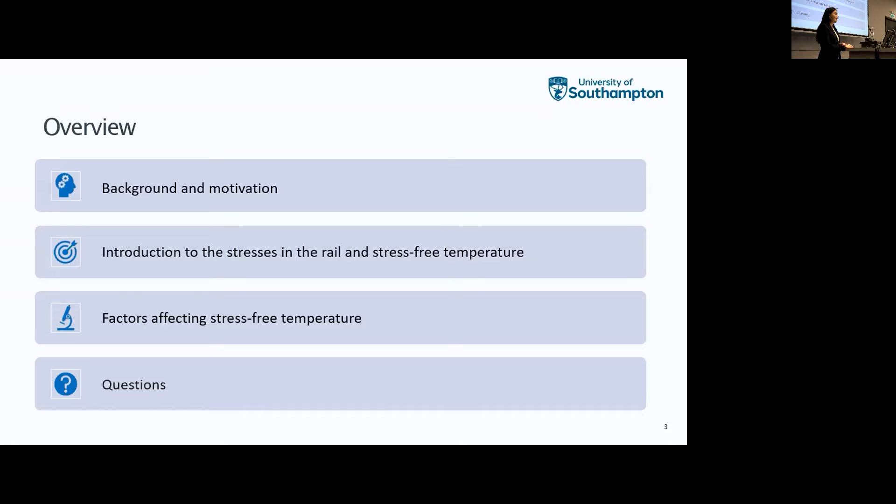We'll talk about the background and motivations behind my project, and then I will introduce you to the stresses in the rail and stress-free temperature, and explain why it's important. After that I will talk about the factors affecting the stress-free temperature and present some studies from my research, and hopefully at the end I will leave some time for questions.

Railways form an indispensable part of our social and economic infrastructure. They play a vital role in passenger movement across the UK, connecting people and communities. They have a part to play in reducing traffic congestion, pollution, and carbon emissions. Also, rail travel is perhaps the only form of mass, rapid, and long-distance transport realistically offering carbon dioxide zero emissions at the point of use on electrified lines.

Disruption can be caused due to rail breaks, track buckles, signal failures, and damage to the track bed, such as ballast washout during floods. These disruptions can endanger life and cause damage that is costly to repair. To mitigate future risks, the resilience of the railway infrastructure to expected climate change needs to be improved. In recent decades, much work has been done to improve our understanding and ability to manage rail stress, and yet it continues to be a concern for many companies worldwide. My research is concentrating on the management of rail stress with climate change for the continuously welded rail track.

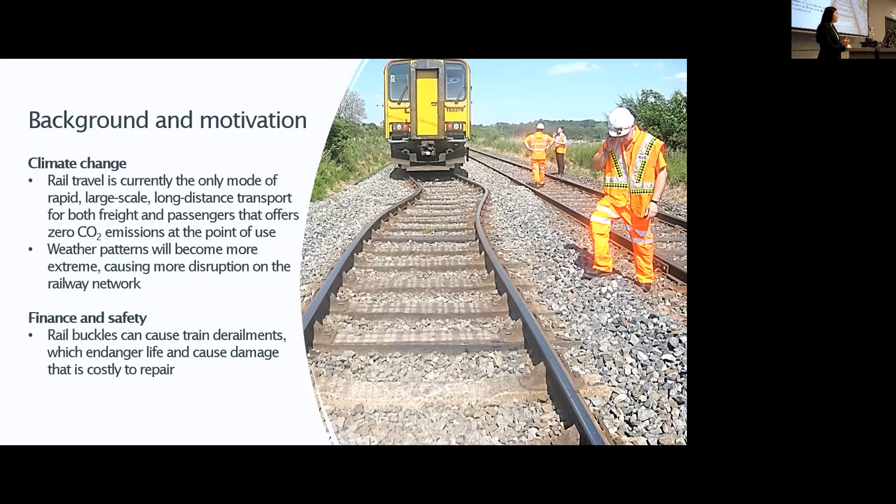This accelerates rail failure, sleeper wear, and disruption of the ballast at the joints. So with time, continuously welded rail was introduced to eliminate these issues. Instead of connecting two rail sections with joints and leaving an expansion gap between them, engineers decided to weld long sections of rail. This eliminated the issues associated with jointed rail track, but it brought up a new issue, which is the buildup of stress, as there is no gap in between steel sections anymore.

To better understand this, I produced some figures. In the first figure, we have a steel beam fully fixed on one end and free on the other, to represent the jointed railway track. When the temperature increases, it can expand and contract freely, and the structure will not be disturbed.

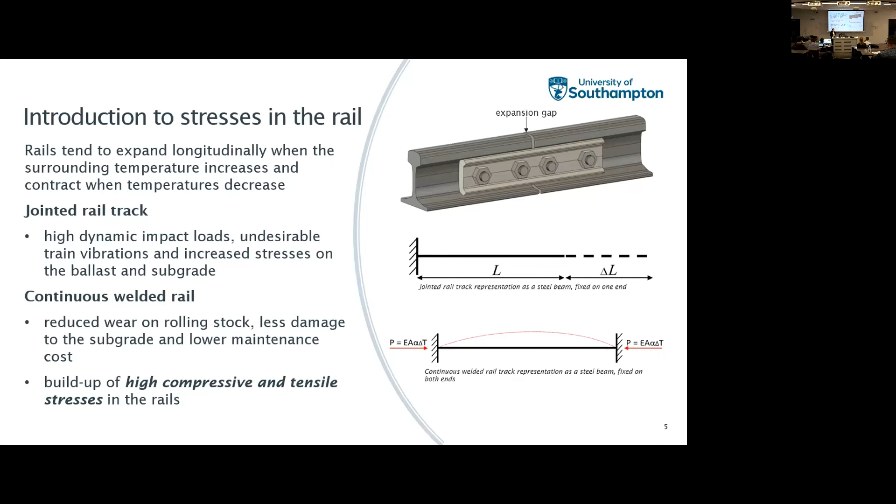So to manage the range of temperature the rail can withstand without buckling or breaking, the stress-free temperature was introduced. So what is the stress-free temperature? Stress-free temperature is the temperature the rail is fastened to the sleepers without the creation of stresses. It can also be called installation temperature. In the UK, it is at 27 degrees Celsius.

So large internal tensile or compressive forces can lead to rail breaks or track buckles. And it can happen when the internal forces are sufficient to overcome either the local tensile strength of the rail or the lateral restraint to buckling provided by the track system.

Also, the stress-free temperature is used to determine the critical rail temperature, which is the temperature at which measures to protect the traffic must be taken, usually speed restrictions.

However, it is not easy to measure the actual stress-free temperature in the rail, as the measurement techniques are generally difficult to deploy. Thus, it is important to understand the factors affecting the stress-free temperature so it can be easily estimated and the correct critical rail temperature can be assigned to prevent any accidents.

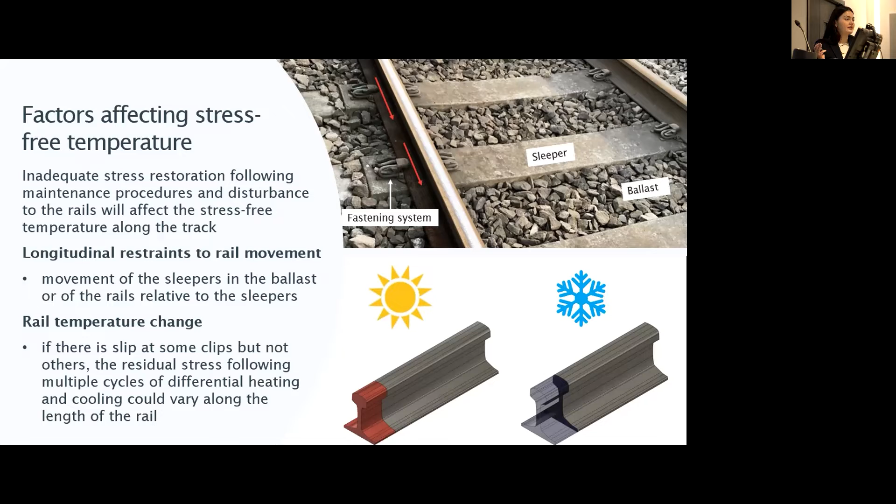This depends on the track location, so part of the track located, let's say, in the sun and part in the shade. And if the fastening system is not adequate, there can be differential movement from the hot part of the rail to the part of the rail in the shade, affecting the stress.

So the third factor is the longitudinal acceleration forces. These forces also require inadequate condition of the fastening for them to permanently affect the stress-free temperature.

I decided to have a closer look at track settlements. As I said before, due to these track settlements, the rail tends to bend vertically to fill in the gap in the ground.

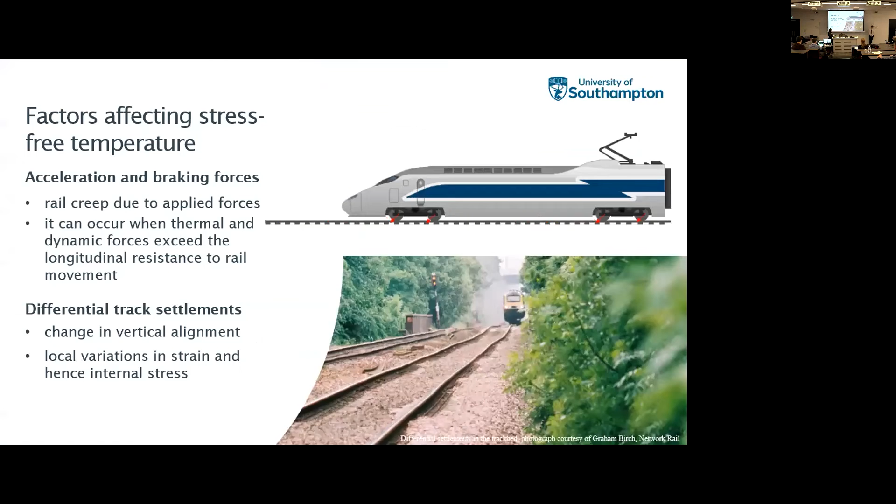Yeah, so if I can, I go back. So as I say, we have something called the stress-free temperature of the rail.

So basically, when the new track is built, or after the maintenance, the engineers come and they stress the rail to a temperature of 27 degrees in the UK. At this temperature, the rail has no stresses, so the stress is zero.

In other parts of the world, for example in China, where the temperatures are higher, the stress-free temperature is probably going to be higher because they don't experience the low temperatures. But for the UK it has to be 27 degrees, because in winter we do have low temperatures, and if our stress-free temperature were higher, in winter we would experience track buckles.

Sorry, the rail breaks. It might reduce the track buckles in summer, but it would be dangerous for trains to move in winter. In some countries they also re-stress the rails.

For example, if they have really hot summers and really cold winters, they do re-stressing of some parts of the rails, but it's expensive. In the UK they don't want to do it, and there's no point doing it because our temperature variation is not that big. We don't have like minus 40 and plus 50.

So for now the stress-free temperature is 27 degrees, but it's also part of my research to look into whether we need to increase it a few degrees, or whether we can just leave it as is and do some re-stressing at certain months. But yeah, for now, I hope that answers your question. Thank you.

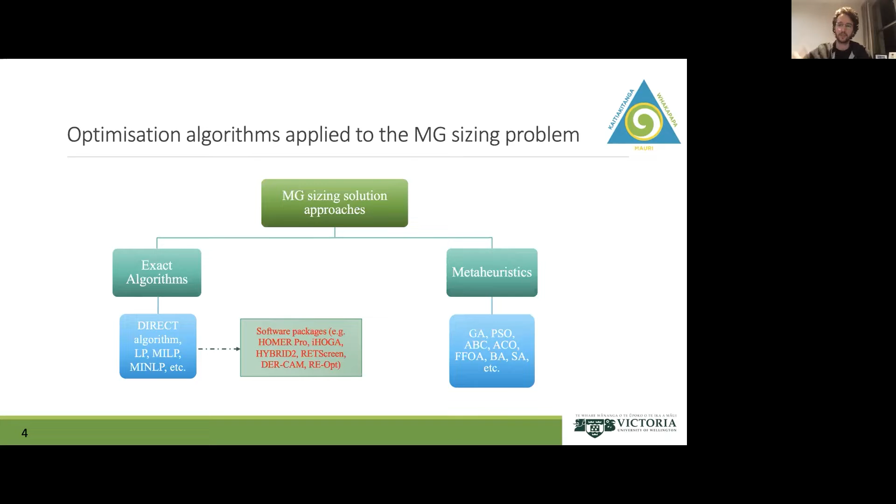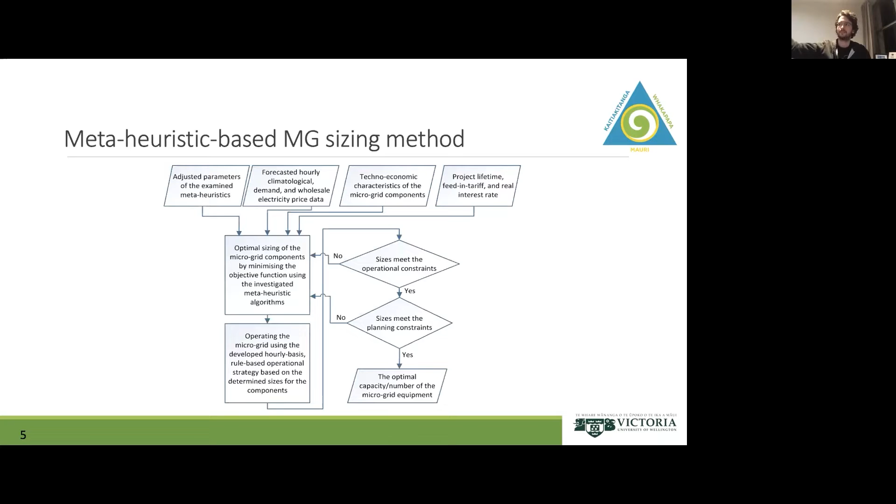This is subject to several technical and operational constraints, including reliability constraints and the set points of the components. These iterations continue until all constraints of the problem are met, giving us the least cost solution set of the optimal sizes of the components, as well as the associated total net present cost of the project and the cost optimal sizes of the components.

Unlike the mainstream approach currently used in those meta-heuristic based microgrid sizing methods, in terms of the dispatching and scheduling of the components - which is commonly a rule-based algorithm like a greedy cycle charging algorithm - what we've proposed is to use a linear programming based forward-looking dispatch strategy over a moving 24-hour horizon.

In this dispatch strategy, integrated into the overall meta-heuristic based microgrid sizing flowchart I've just shown you, we've divided the year-long operation of the system into daily sub-horizons. In each of those daily sub-horizons, we minimize the operational cost function. This optimization problem is solved on a daily basis at an hourly resolution, subject to several operational level constraints, and this continues until we have the optimal schedules of the components for the entire year.

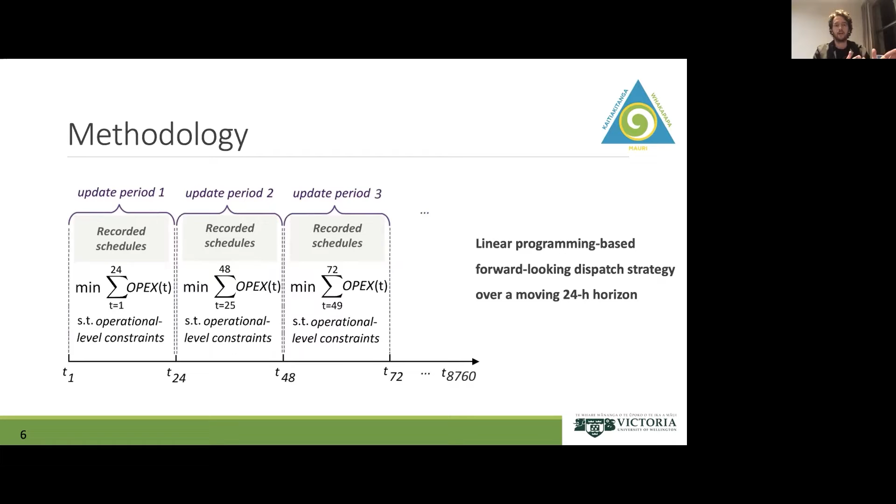So we can have power exchanges with the wider utility network. But unlike the cycle charging scheduling strategy, here all those power exchanges and the scheduling decisions are based on optimization rather than predefined rules.

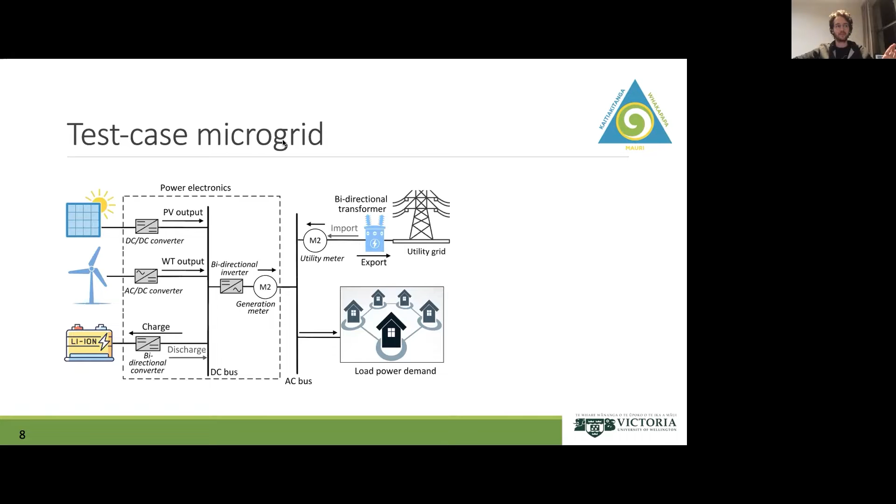As a test case, we've used the conceptualized test microgrid for a residential subdivision in New Zealand, in the North Island. The residential subdivision is an 8-lot subdivision, and we have used that test case microgrid system to provide a reliable, affordable, clean electricity generation system for the community residing in the Tutara Bank Eco Village. So we have 8 freeholding lots and a communal building in this case study.

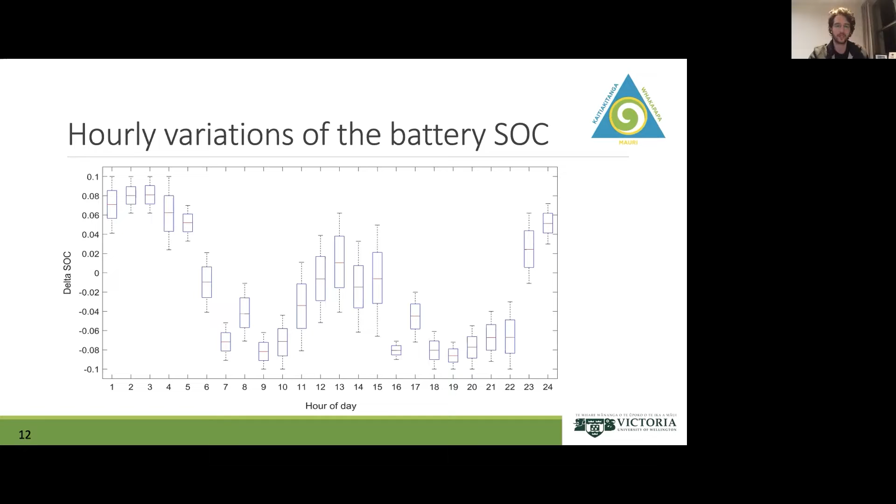This is because at those hours, mainly the solution algorithm decided to import the peak load demand, rather than overbuilding the generation assets, and it also didn't decide to allocate a large battery capacity. This is why the delta SOC is much lower during the peak hours compared to the off-peak hours.

So as conclusions, we have devised a novel design and dispatch co-optimization modeling framework for grid-connected, battery-supported, renewables-driven microgrids. And we have shown that a look-ahead multi-day optimal energy management is a useful approach for designing cost-effective microgrids that integrate energy storage devices with appropriate operational timescales.

As future work, we have planned to integrate demand-side flexibility resources into the proposed co-optimization framework, and also we plan to characterize various sources of data uncertainty, such as uncertainties in forecasts of load demand, meteorological data, and wholesale power prices, to make the results more realistic so that they can better represent reality. Thank you very much for your attention, and I'm happy to take any questions you might have.

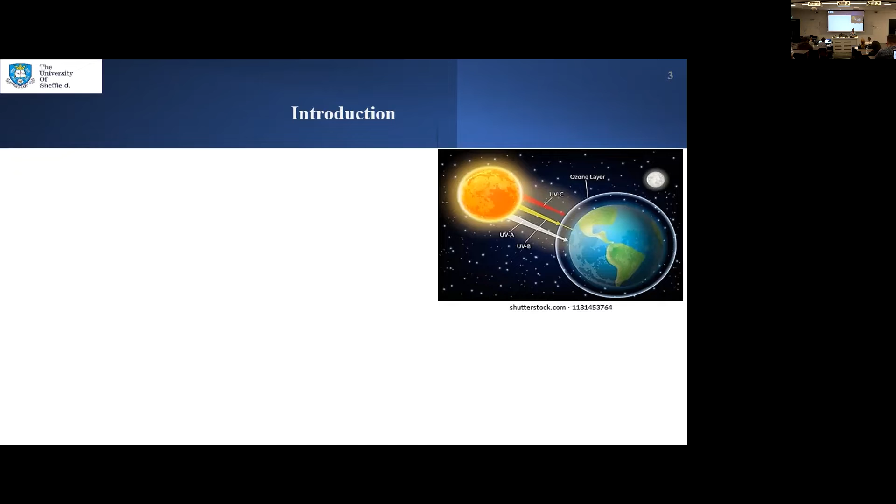So there's an image that illustrates how the Earth receives photon energy from the sunlight, obtained from shutterstock.com. As you can see, the Earth receives photon energy from the sunlight, but the angle of the sunlight influences the amount of energy received by the Earth. Based on data released recently by Solar Energy Explained Science, they claim the Earth receives about 173,000 terawatts of photon energy every hour.

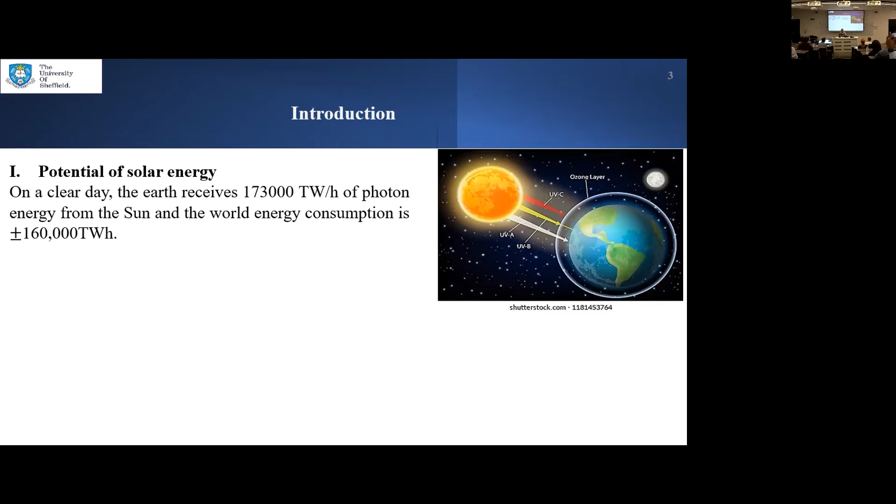Before the COVID-19 lockdown, the total world energy consumption was around 160,000 terawatt-hours, which means using photon energy to generate electric power is a promising technology. This has motivated research scientists to go into renewable energy for production of electricity, such as using wind energy, solar photovoltaic, or hydroelectric power.

So what makes this technology an effective way of generating electricity is basically the photovoltaic effect. What is the photovoltaic effect? Generally speaking, it is the release of electrons from a conducting material—this conducting material can be a metal or a semiconductor. This is an illustration of a conducting material. Based on quantum mechanics theory, it's claimed that all conducting material has electrons in them which move randomly.

When they absorb sufficient photon energy, the electrons in a conducting material try to escape. So when photon energy hits a moving electron within a conducting material, after absorbing sufficient photon energy from an external source, the electrons try to escape. This allows the possibility of harnessing this electron to produce electricity.

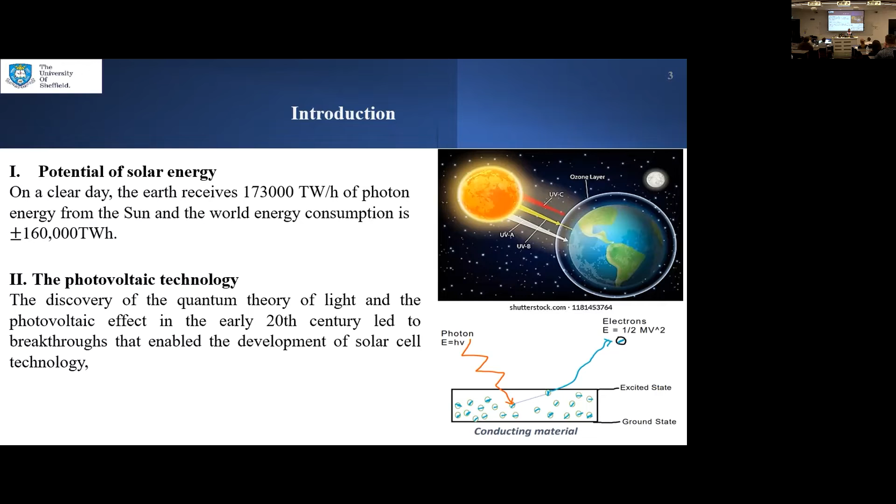Photovoltaic is categorized into three working principles: photovoltaic that works based on p-n junction, photovoltaic that works based on excitonic principles, and photovoltaic that works based on p-i-n junction. P-n junction is basically made of inorganic materials such as silicon, germanium, and cadmium telluride.

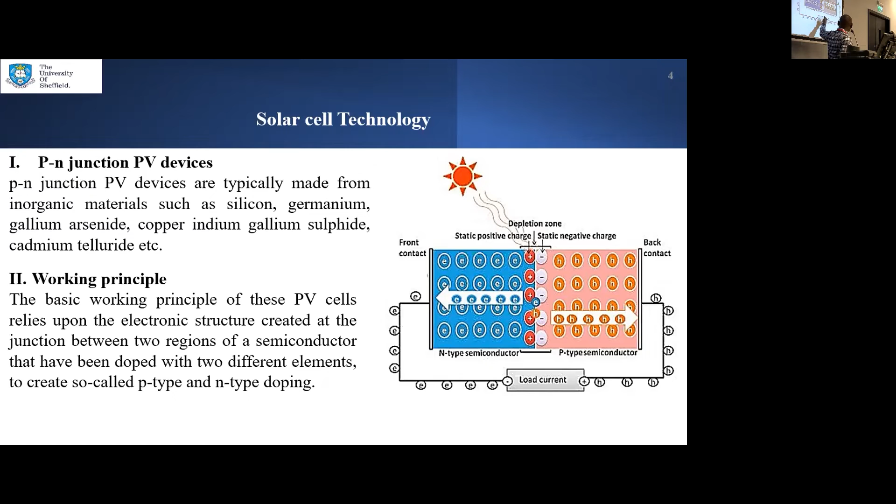How do they work? They work based on a semiconductor that is partially doped with either boron or phosphorus to create an N-type semiconductor and a P-type semiconductor.

For organic materials, they are actually made of excitonic materials. That means the organic photovoltaic is made of excitonic materials, which means the electrons in them are combined together.

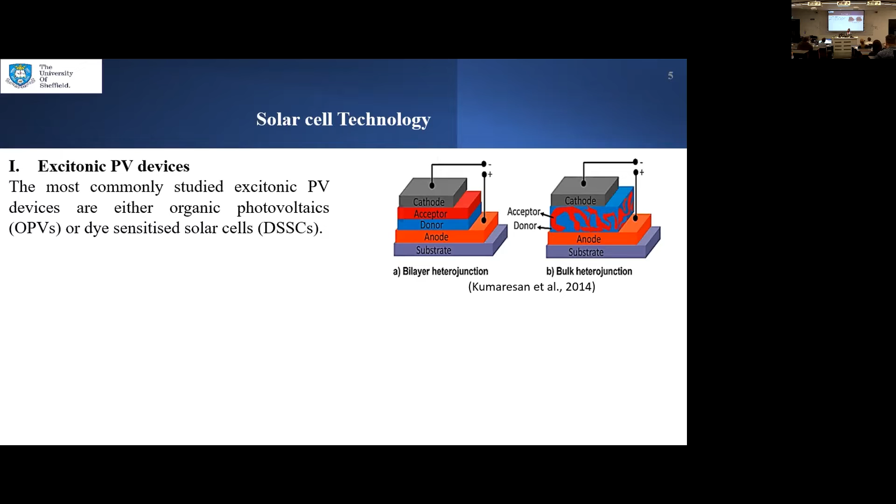That is, you have your electrons and hole attached together, which could be explained from here. You have your electrons and hole together, and this requires a separate material in order to separate the two. That is, to separate this exciton, you need an electron acceptor and an electron donor.

This is also a dye-sensitized solar cell, also known as an excitonic method of generating electricity. This uses mesoporous nanoparticles made of titanium oxide, which is coated using ruthenium polypyridine, to create where you have your electrons.

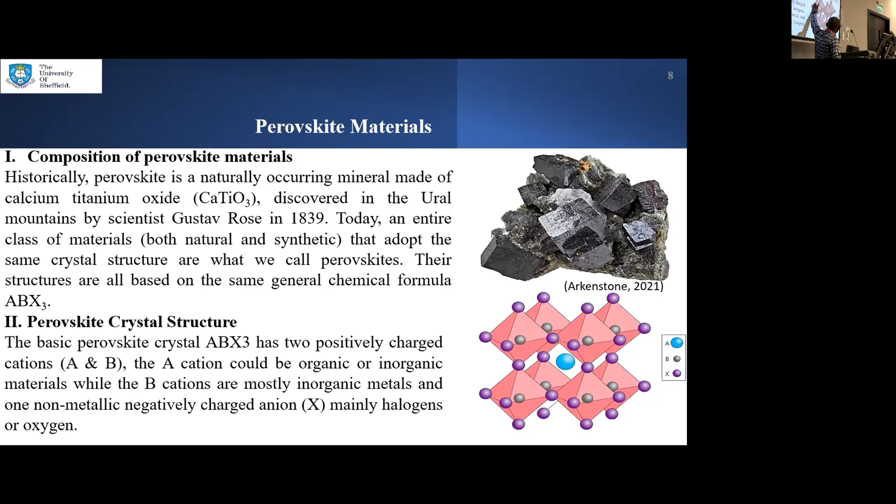This is just a structural illustration of how perovskite looks like. You can see from here the general formula of perovskite: ABX3, where A and B are made of cations, and X is made of anions, mostly halide - mostly iodine, fluorine, and bromine.

How do we fabricate perovskite solar cell? Perovskite can be fabricated by different methods. We have spray coating, spin coating, inkjet printing, and slot-die coating.

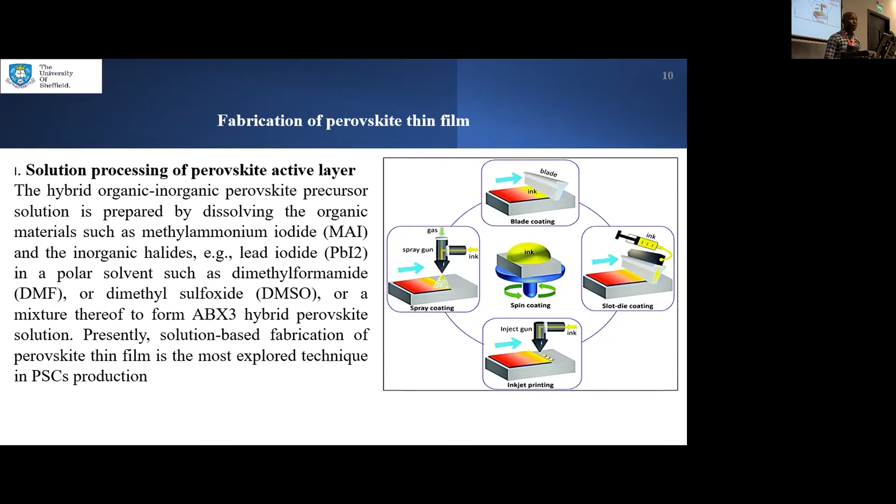But most of the time in laboratory fabrication, we use spin coating to fabricate perovskite solar cell. Why do we use spin coating? Because it's the easiest and fastest way of producing perovskite in a very short period of time.

So how do we spin coat perovskite using a spin coating machine? Basically, this can be done either by introducing an anti-solvent or by directly coating and fabricating your perovskite material.

We directly spin coat our perovskite on a glass substrate and then anneal for some time to create a perovskite crystal surface. Or we can introduce an anti-solvent during spin coating - here you can see we have anti-solvent to produce a perovskite surface. Finally, we go through using two methods.

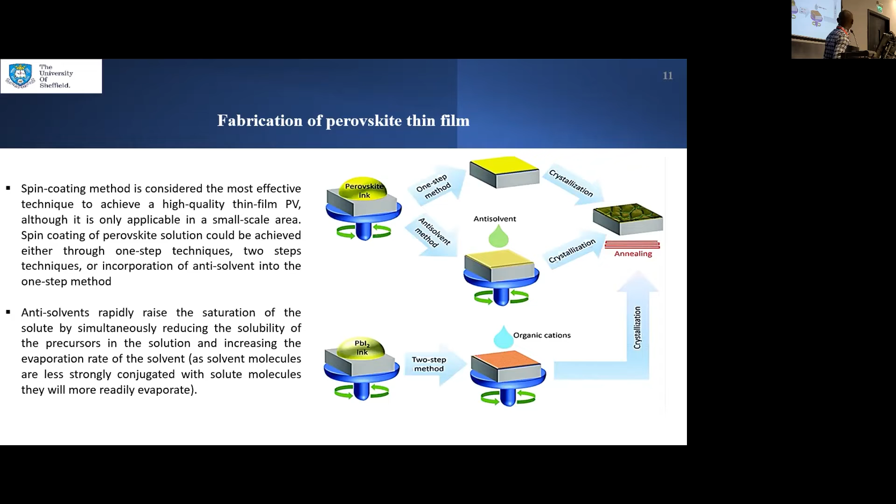As I explained initially, perovskite is made of two cations and anions. The first cation is mostly made of methyl ammonium, and the second cation is made of lead iodide. So if you have your lead iodide as your first cation, then you add your second organic material made of methyl ammonium, and then anneal it to give you your perovskite surface.

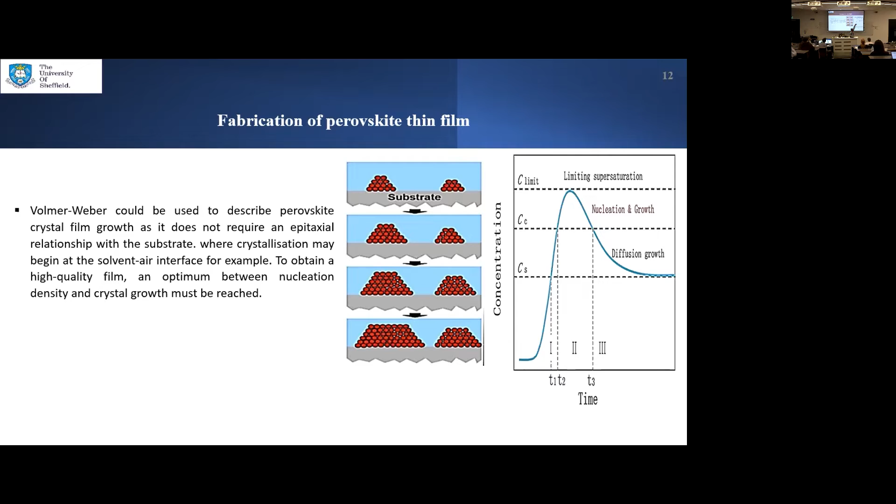How do these crystals form after you spin coat your perovskite solution on a substrate? Basically, we tried to emulate the Volmer-Weber growth method, which shows how the perovskite transforms after a certain period of time. At the initial stage, when the solution is being coated on a substrate, the concentration tries to increase, and it reaches the maximum concentration, resulting in the formation of the perovskite crystal surface.

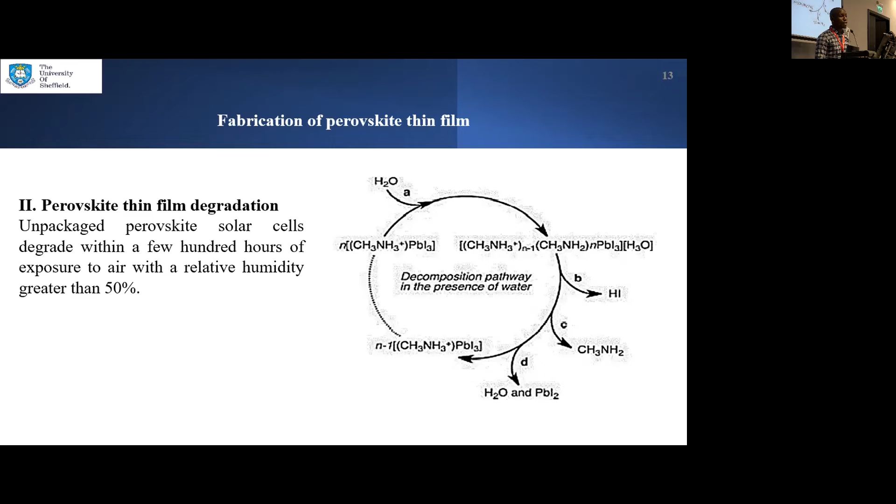Well, one of the disadvantages of perovskite is their degradation. They tend to degrade easily if they are not well packed. So most of the time, people try to use a separate glass substrate to encapsulate the surface so that it can stay for a long period of time.

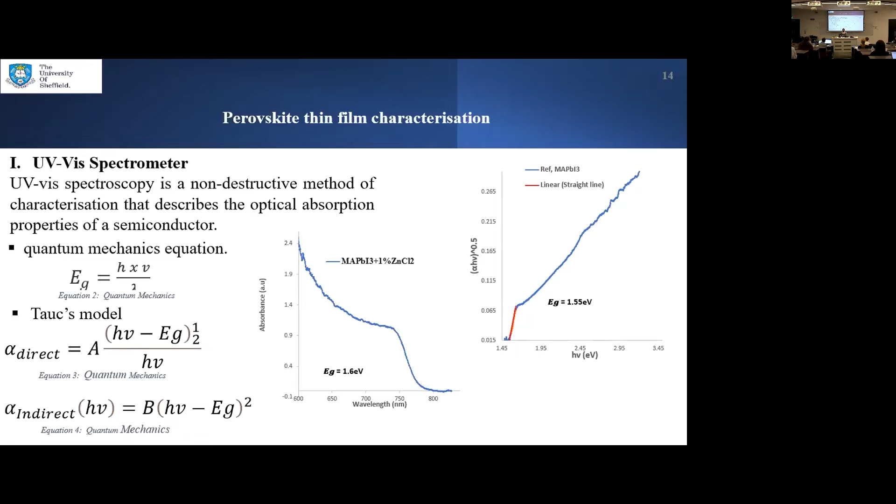Another way a band gap can be determined is using a Tauc model, which is the most accurate method to determine the band gap of a perovskite surface. In our first calculation, we determined the band gap to be around 1.6 electron volts. But when we used the Tauc model, we got 1.55 electron volts. Although the difference is not much, this allows you to accurately know the band gap of the perovskite that is being produced.

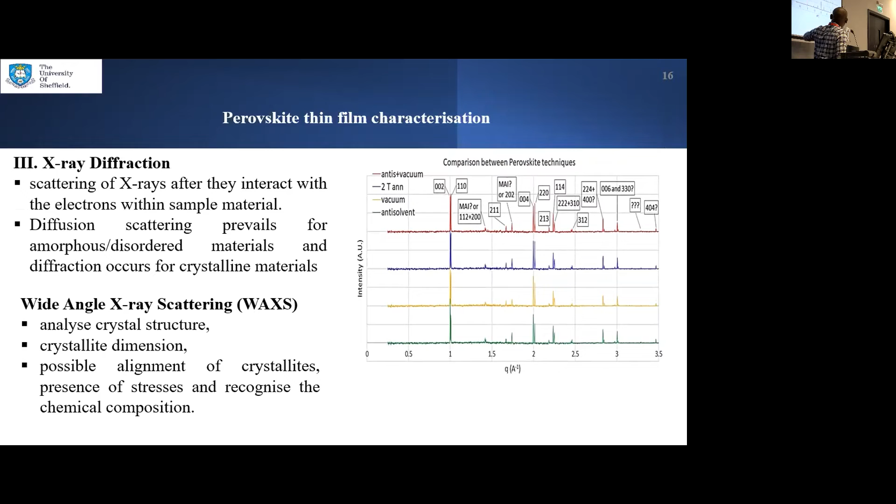X-ray diffraction illustrates some of our results. This result was obtained from one of my colleagues, Francesco, who used wide angle scattering to try to determine the difference between the materials being used.

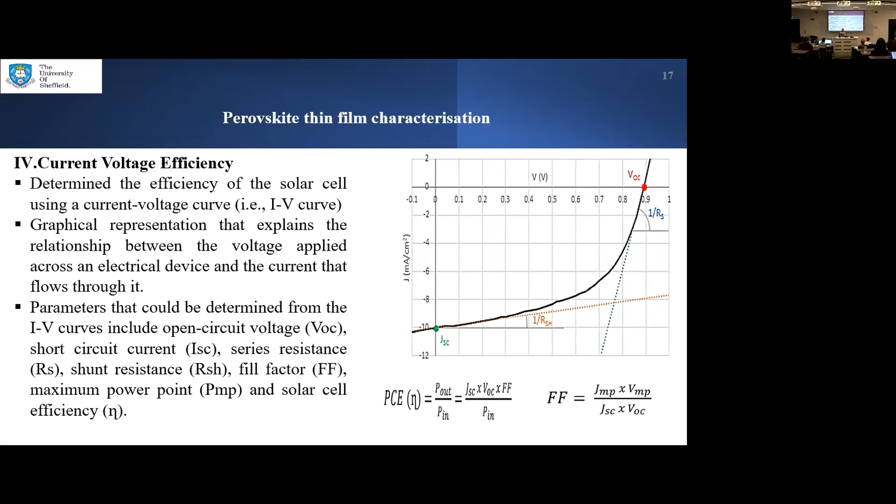Finally, this is a solar perovskite thin film. This is an IV curve that illustrates how the current and open circuit voltage is generated using a solar simulator. This solar simulator gives all the results, because after you make your solar cell in the laboratory and use the solar simulator, it provides the results. But to accurately determine the efficiency of the solar cell, it's also advisable to make the calculation manually.

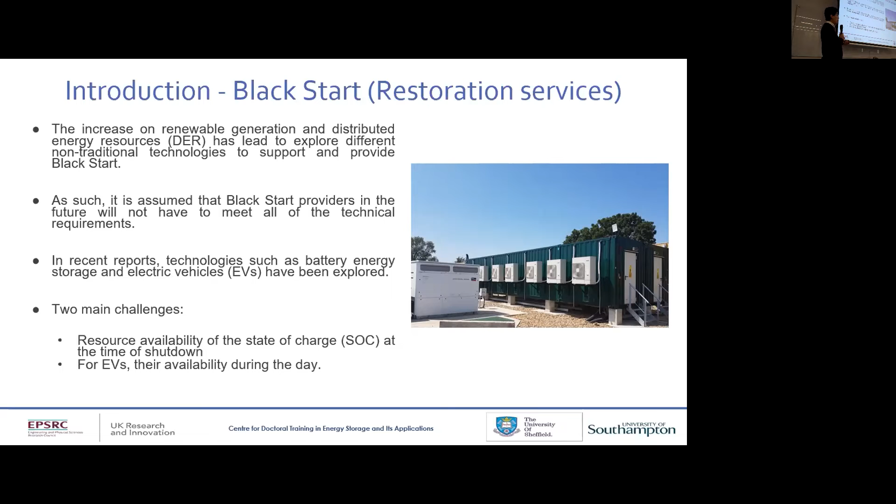Now, how can an EV support or connect to the National Grid to provide a service? Before that, a little bit of background on this technology. There is this technology called smart charging. It allows the EV to charge when electricity prices are low and/or when demand is low, so it reduces the demand on the electricity grid. This also provides the benefit of reducing the owner's electricity bill.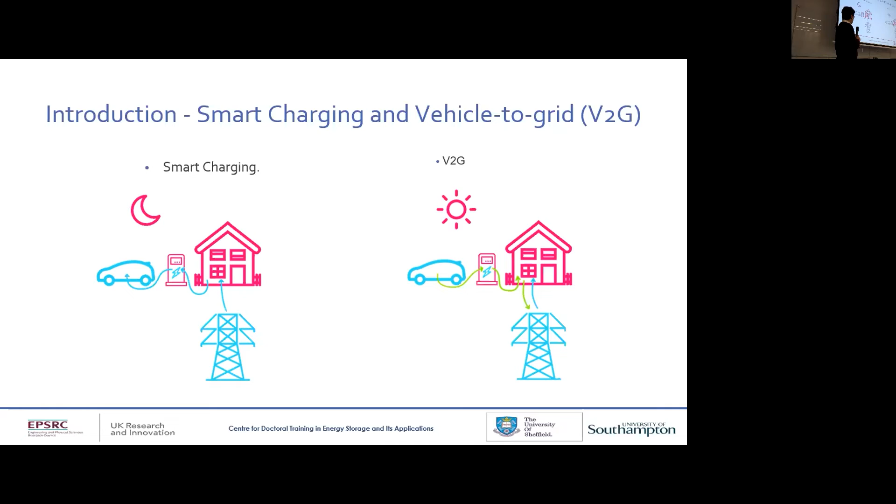Now, with V2G, it has all the benefits of smart charging, but it also connects and sends energy back to the National Grid. This energy can be sold and they get some money depending on the amount of energy they give back.

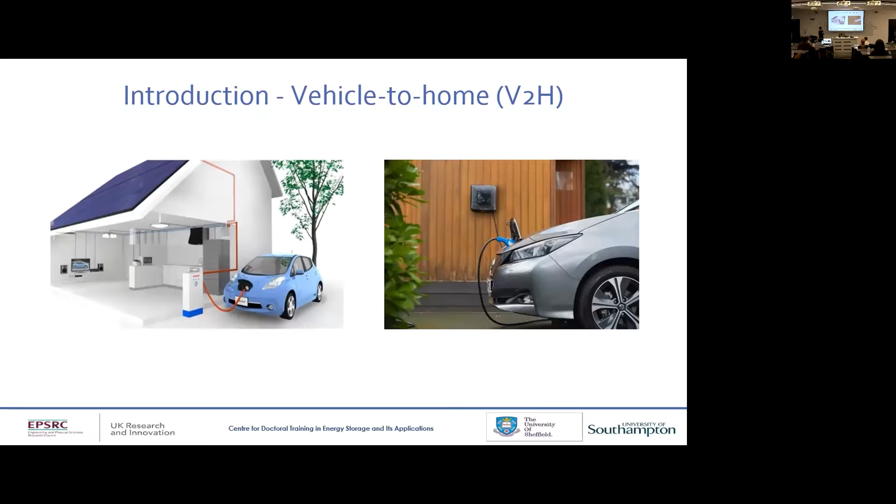Now, a type of V2G use is called vehicle to home. This technology allows the owner to give back energy from the EV to their house, reducing even further their electricity bill during the week. It also includes all the benefits of smart charging and V2G as well.

Now, for this study, we asked a few questions about whether they can provide the service or not. The first question is: can we predict the availability of EVs to provide V2G and V2H services? The second question is: can we reduce the consumer's electricity bill by providing these services? Also, what is the EV's minimum state of charge available at all times during a week? Does PV ownership have any impact on the results? And do energy tariff prices have an impact on the results? We're going to find out in a bit.

For this, we developed a machine learning model using data from the National Travel Survey, collected from the UK government, which collects data on how, why, when, and where people travel in Great Britain. This data is from 2002 to 2019 with around 5 million records.

From these 5 million records, only around 2.2 million people are reported as private car owners. Then, from this data, we split it into two data sets: one to predict the start location of the EV, with around 1 million records, split into 70% training and 30% testing.

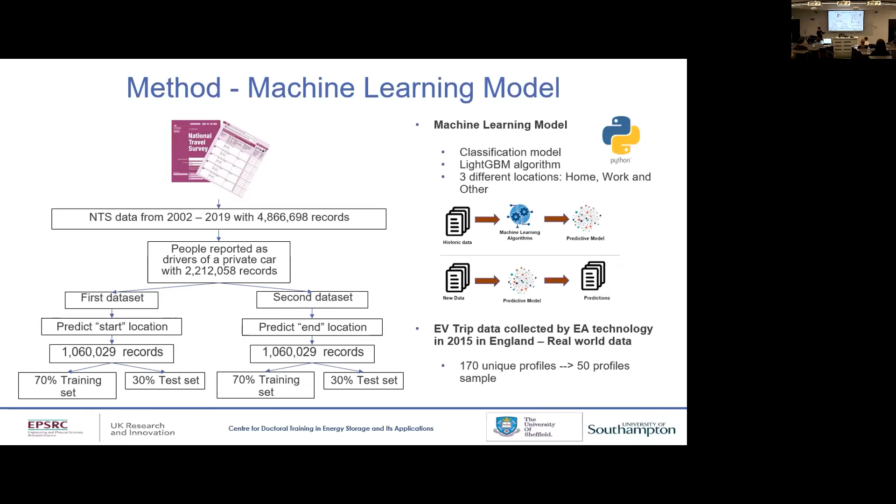This new data is EV trip data collected by a company called EA Technology in 2015 in England, so this is real world data. After cleaning the data, we got 170 unique profiles, and then took 50 profiles as a sample.

For the optimization model, we created one with the objective of minimizing the consumer's electricity bill and maximizing the minimum SOC at all times for all EVs. This model was formulated in Python using the Pyomo framework, and we used Gurobi as the solver. We also took 4 different weeks, representative of the 4 seasons: winter, spring, autumn, and summer.

For the EV data, we considered the specifications of the Nissan Leaf 2018, which has a 30 kilowatt hour battery capacity, and we considered usable battery capacity for V2G or V2H between 5% and 95%. We used a bidirectional charger, V2G ready, of 7.4 kilowatt power, only charging when the EV is at home, and also a 50 kilowatt street charger when the EV is not at home or at work, in case they need to charge further during the day.

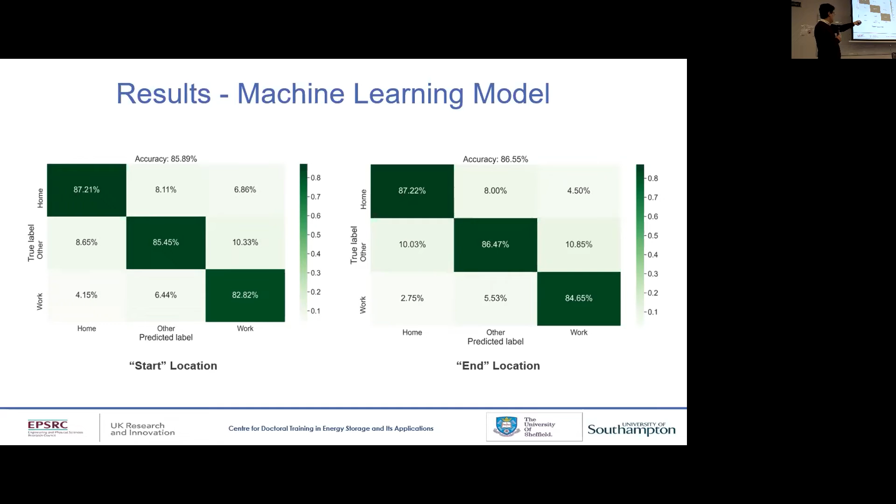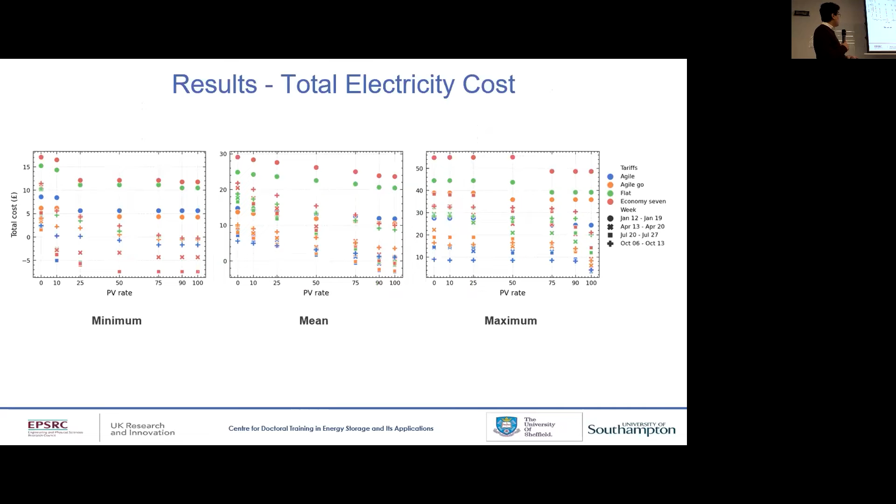Those are the results. In terms of the, oh, it's an extra one, it didn't really change, it's the same.

So with that being said, the conclusion. In terms of the machine learning model, again, the model successfully captured the travel patterns of the EVs during each week of the year that we tested. In both models, the overall accuracy was above 85%.

In terms of total electricity cost, depending on the tariff and the season of the year, the electricity cost can be as low as -£8, which means you will get paid for charging and discharging using your EV, and as high as £54 per week. On average, you can expect a total electricity cost between -£4 and £30, again depending on the season of the year.

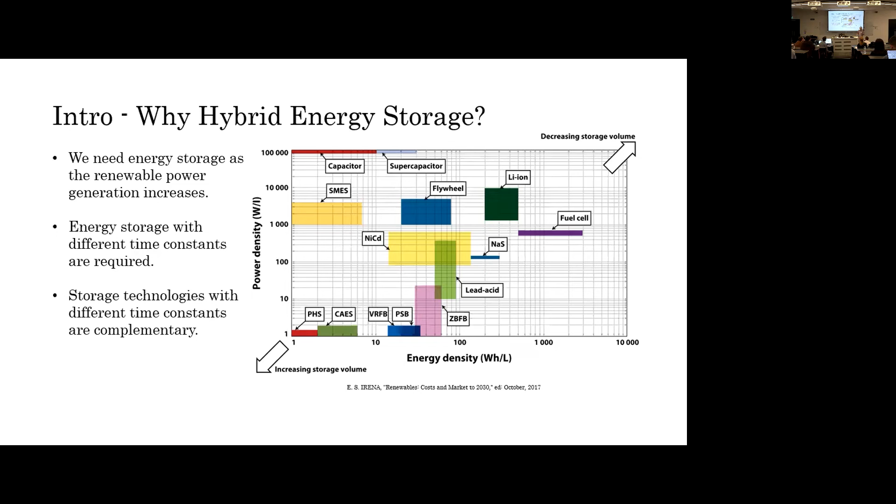The hybrid systems. All right, the second one.

Why? Because you don't actually need 16 kilowatt hours to do this 30 days. You need a battery of, let's say, 4 kilowatt hours that can do only 4 days. So you don't actually need a lithium-ion battery of 16 kilowatt hours for that. If you multiply this 100 times, that's going to be 3,000 cycles, that's a lithium-ion system. What you need maybe is a battery of 10 kilowatt hours, a lithium-ion battery of 10 kilowatt hours, and another technology that can do 4 kilowatt hours, maybe a lower spec.

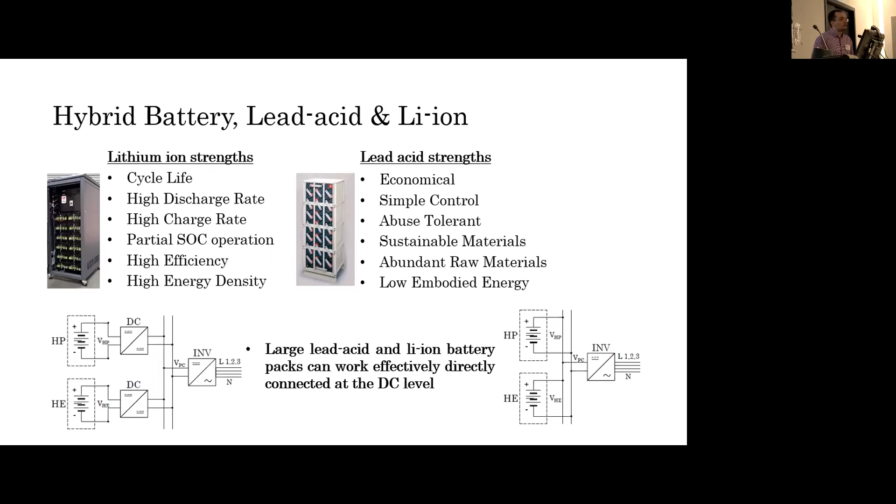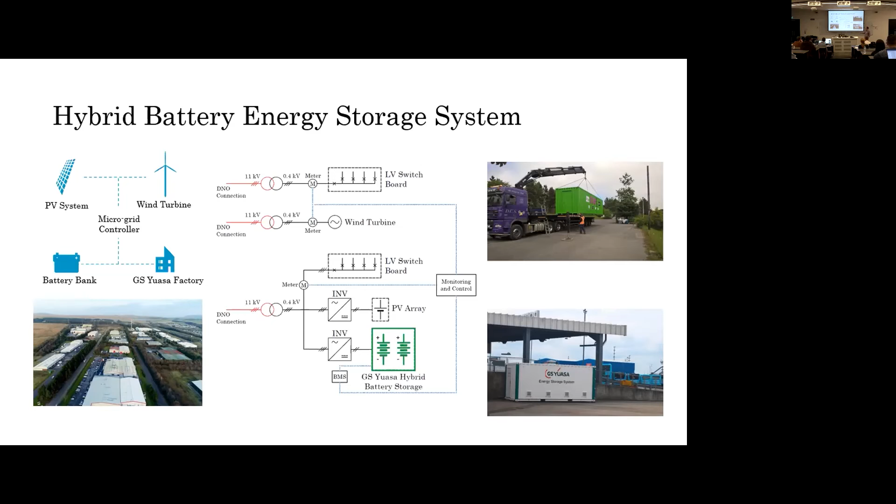So we're only looking at peak shaving with the GS Yuasa battery now. More recently, there have been some more installations of this type—by the way, this one was the first of its kind in the UK. For example, this one went live last year in Portsmouth Port, very close to Southampton, where I live. This kind of system, because it offers such a simplistic solution, has attracted quite a bit of interest on the energy storage media about this, which is quite interesting for me to see people being interested in something like that.

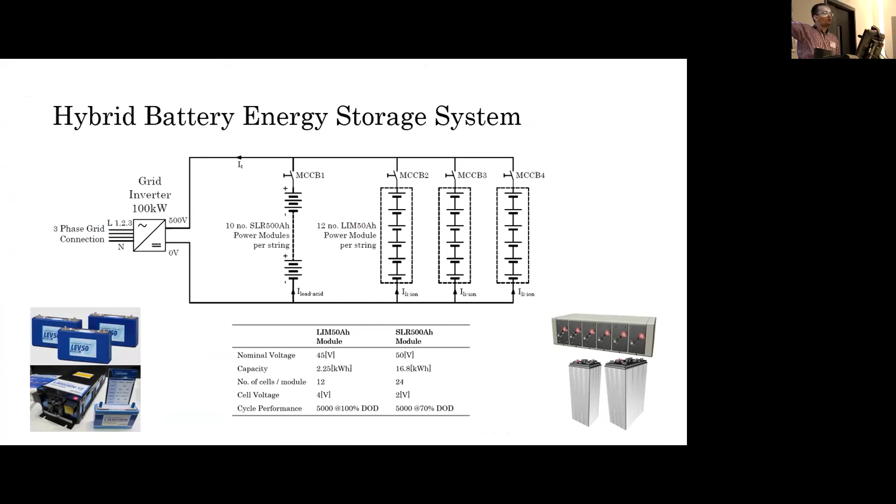So this is a GS Yuasa system, very simple. Batteries connected together - 3 of those are lithium-ion, and there's a lead-acid one as well. There are hundreds of cells in series. You can see here the battery specs, though that's not really important. It's a 100 kilowatt system.

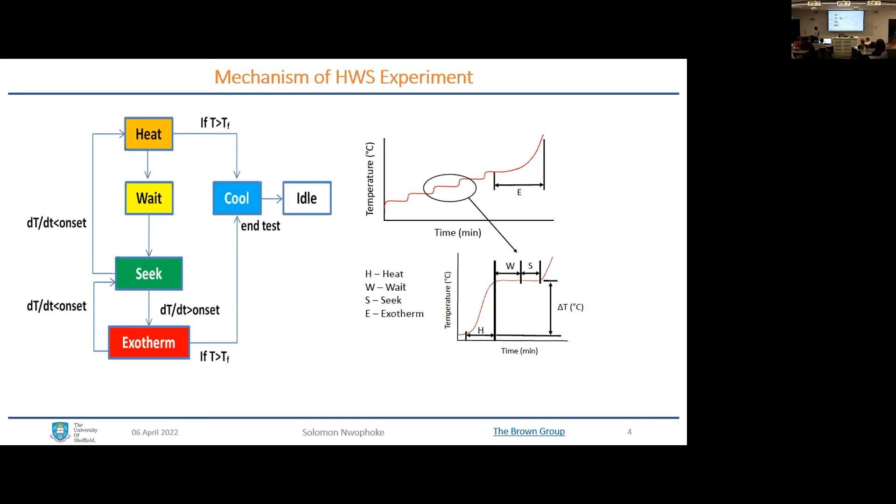On the right-hand side, you see a graphical representation of the mechanism. On top, you see a step, zoomed in here. When heat is applied to the battery, the temperature increases by this step. When it reaches this level, you wait for it to attain equilibrium with the system, then seek to observe if there is exotherm. If there is no heat generation from within the battery, you proceed to the next heating step, continuing until thermal onset, the point when the battery starts generating heat from within itself. At that point the system stops heating the battery and instead tracks the temperature growth of the battery.

The wait time was 60 minutes and the seek time was 10 minutes. The temperature sensitivity was 0.02 degrees Celsius per minute. So when the temperature rate of the battery increases to this level, the system switches to exotherm mode and tracks the heating of the battery.

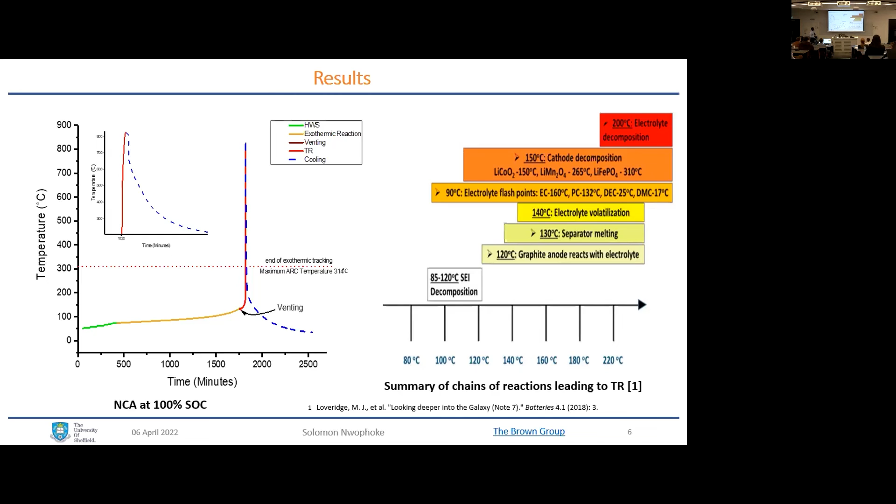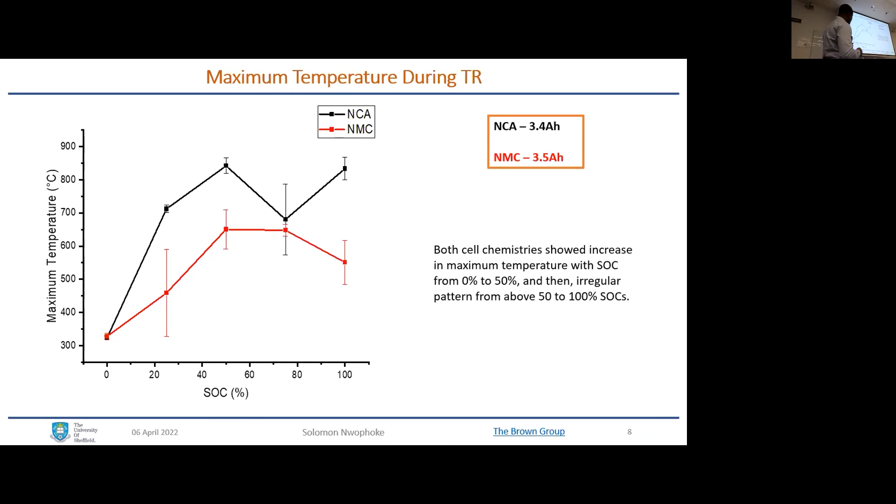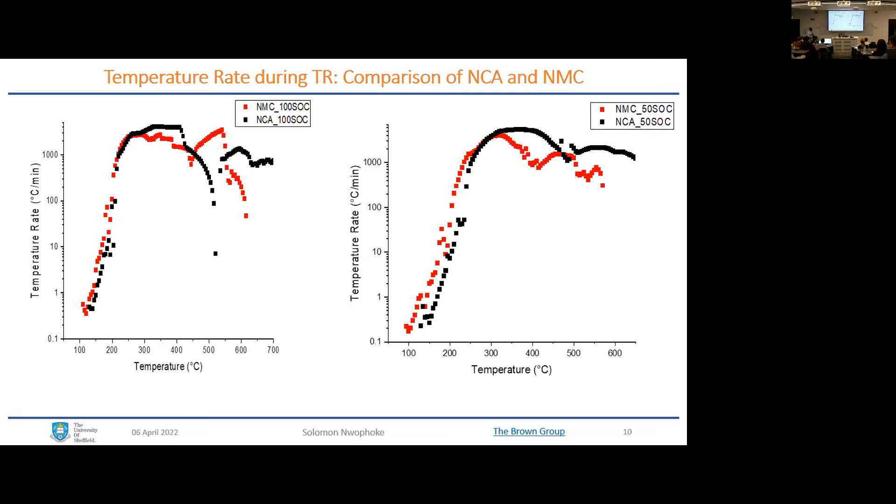Then comparing the heating rate of those batteries, the two samples, at 100 state of charge, you see the NMC have the similar heating rate, but it just occurred a little bit earlier than the NCA. And the same happened at 50 state of charge as well. But what this indicates is that NMC, the reaction occurred more rapidly, and the maximum heating rate was attained earlier, and then sluggishly reduces the heating rate to the maximum point, then cools.

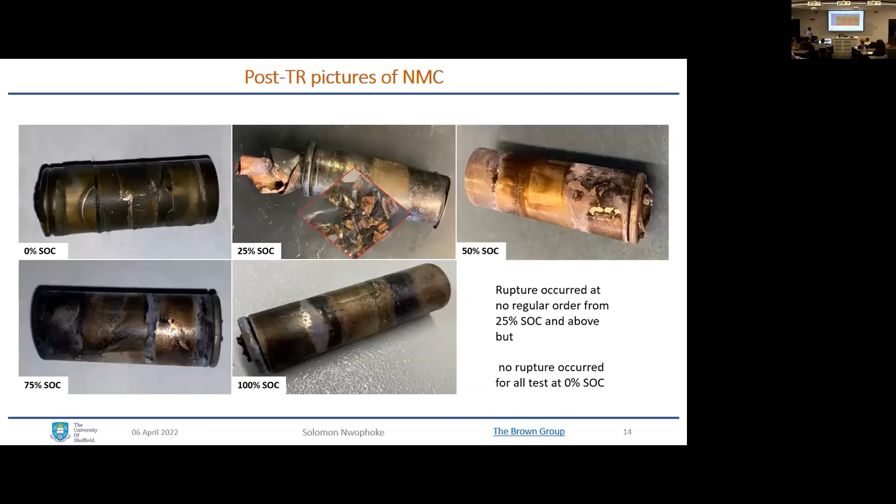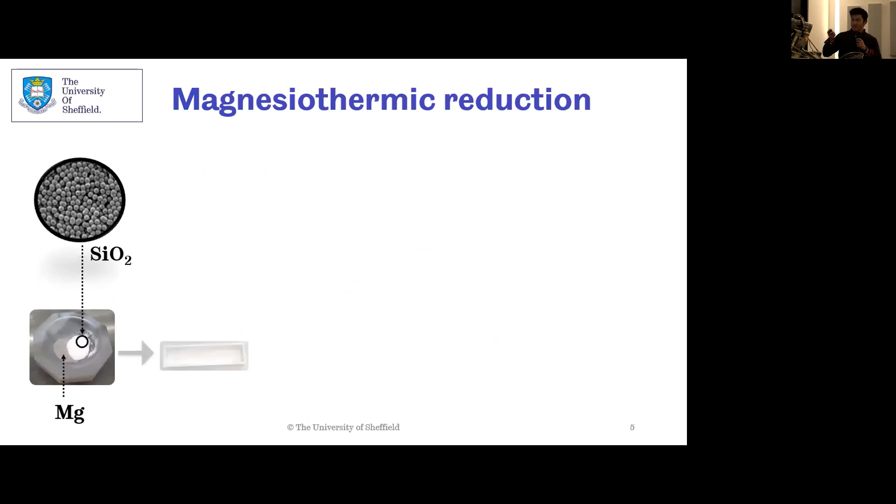So what does the method look like? In a lab, the powders of silica and magnesium are ground and heated up in a furnace. But it likes oxygen, so it won't strip away silica - there's oxygen around it in the atmosphere, so we have to seal the furnace and flow argon through it to make sure no oxygen burns the system.

This is then heated up to 650 degrees Celsius, usually for 6 hours. It's put into 1 molar hydrochloric acid, which is really mild, and then the magnesium chloride, which is in solution, is filtered off, leaving behind porous silicon. It's a cake, actually a moist powder with moisture in it. This is dried in the drying oven and then put into a battery.

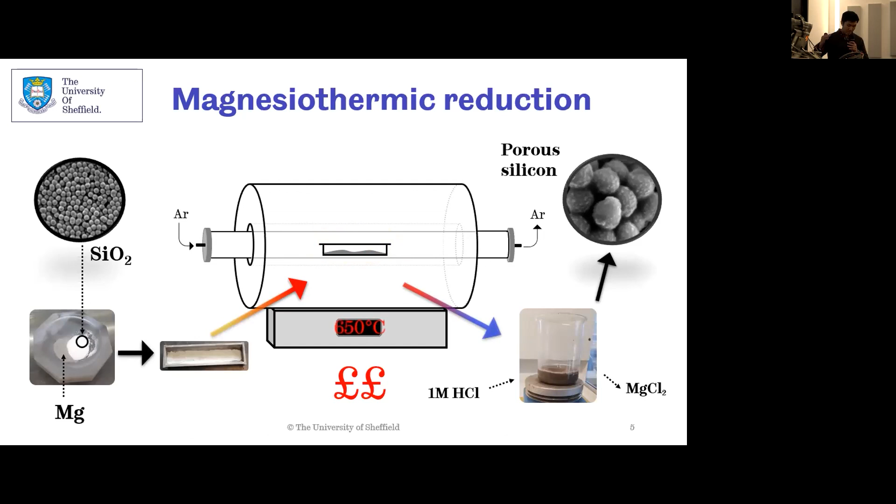So the issue here is that 650 degrees, and I will show you, is quite an uneconomical temperature. The baseline energy cost at the moment hasn't been calculated or forecasted, and therefore, can the magnesium reduction be carried out at a lower temperature than 650? In fact, I'll give a spoiler here - yes, it can, and I'll show you how.

Because it can be carried out at low temperatures, how does this affect the economics of the process? How much does it cost to do it at 650 versus the low temperature? So the first question, I selected or assigned industrial equipment, common industrial equipment.

This was done using a selection criteria that you can find in chemical engineering books for equipment design. And these are the equipment that I've chosen.

The powder mixer takes a specific energy consumption. The rotary kiln accounts for heat loss through conduction, plus heating up the mass of the kiln and the reactants. The impeller stirs the powder in acid, and then a dryer increases the temperature of the moisture and evaporates it.

The baseline conditions I'm using to build this economic model are a 5 degree C per minute ramp rate up to 650 degrees Celsius. This isn't really reported consistently in the literature, so I measured this in the lab and put it into the model.

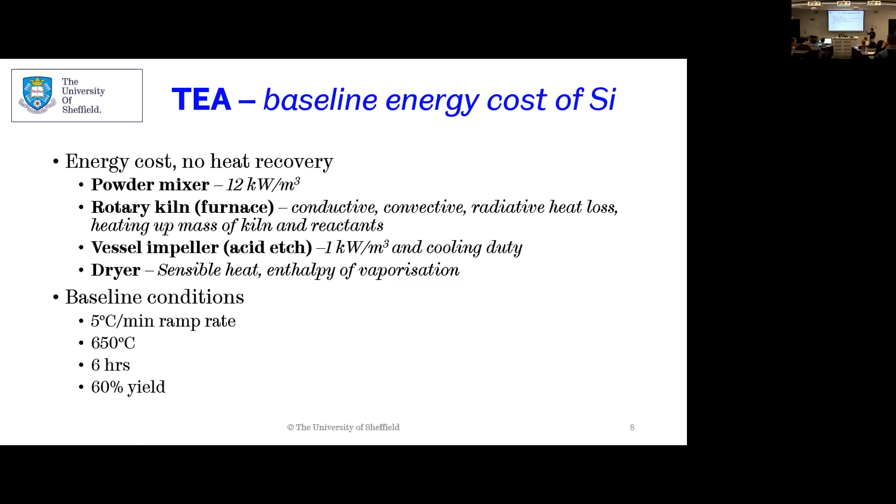I changed each of these variables individually, not in the lab, but just in the model, to see how much each would affect the cost of making silicon. Going from the baseline, changing each of these gets it down to 11 pounds per kilogram. But...

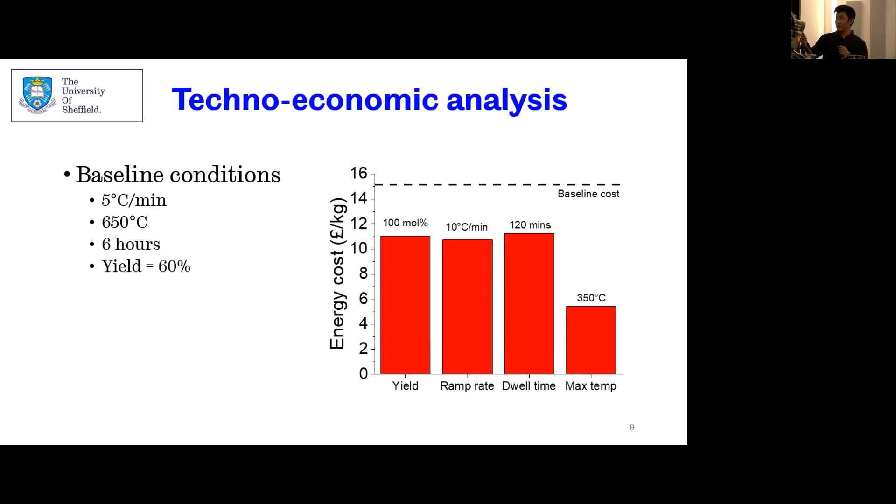That's something that has been achieved in the lab. Well, I have achieved this in the lab. Let me show you how it can be done. So clearly the temperature needs to go down for the cost to go down.

So I've shown you why the temperature needs to be brought down. Now I'll show you how the temperature can be brought down. For the materials chemists among you, this is a solid state reaction, so it's diffusion limited, meaning particle size would affect, amongst other things, how quickly it happens.

So here it is. I made silica particles using the Stöber method at different sizes. This is a well-known method, you can make uniform silica at 500, 75, and 20 nanometers, and then I reduce them with magnesium at different temperatures.

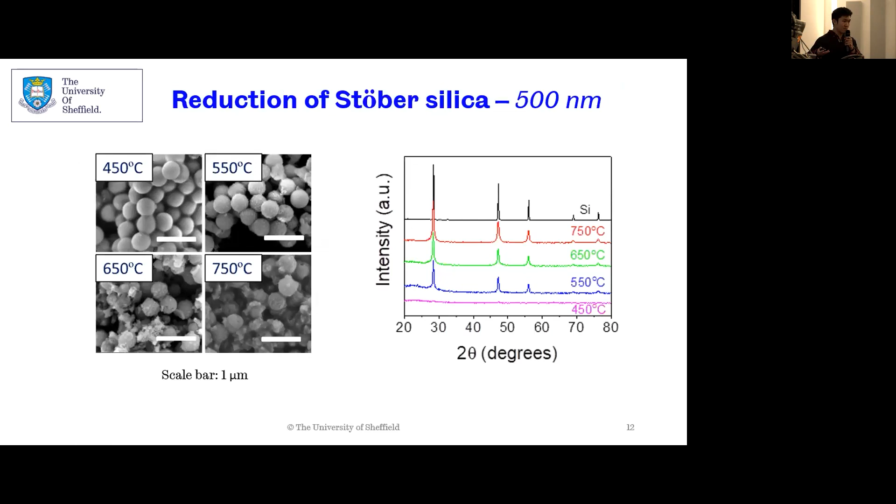On the right you can see XRD data. The 450 degrees Celsius sample does not have peaks for silicon. This is the standard for silicon here, these are the peaks that match up with it. At 550 and above, crystalline silicon is there. At 450, no silicon. So 500 nanometers is too big to react at that temperature.

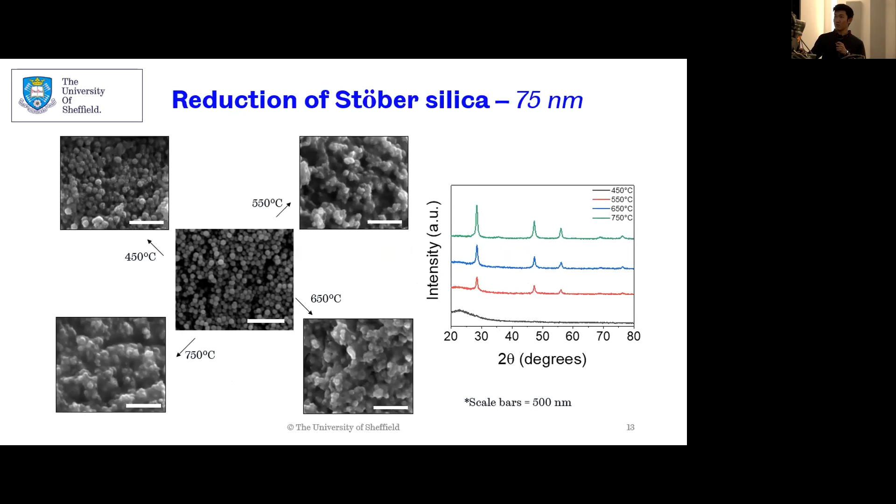With the 75 nanometer particles I found the same thing - anything above 550 degrees Celsius produces crystalline silicon, but 450 degrees Celsius does not. It might look like there's something happening there - I don't know why this is, but I also gold coat the particles, so that could be what I'm seeing. But XRD shows there's no crystalline silicon anyway.

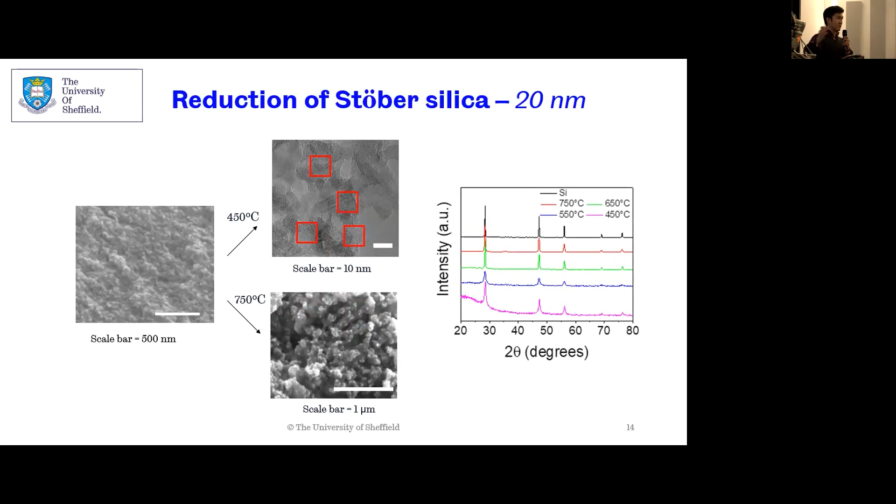So silicon is there, I've just shown you it is there, but how much is there? I did some yield experiments to work out how much silicon was present. At 550 degrees Celsius, regardless of particle size, it reacted to give crystalline silicon, but only the 20 nanometer particles reacted below 550 degrees, going as low as 400, but that's the cutoff point. I did another experiment at 390 and got zero.

I wanted to check whether this was applicable to other types of silica, not just Stöber silica. So I used a different source, and at that temperature it can still produce a yield as high as 60 percent.

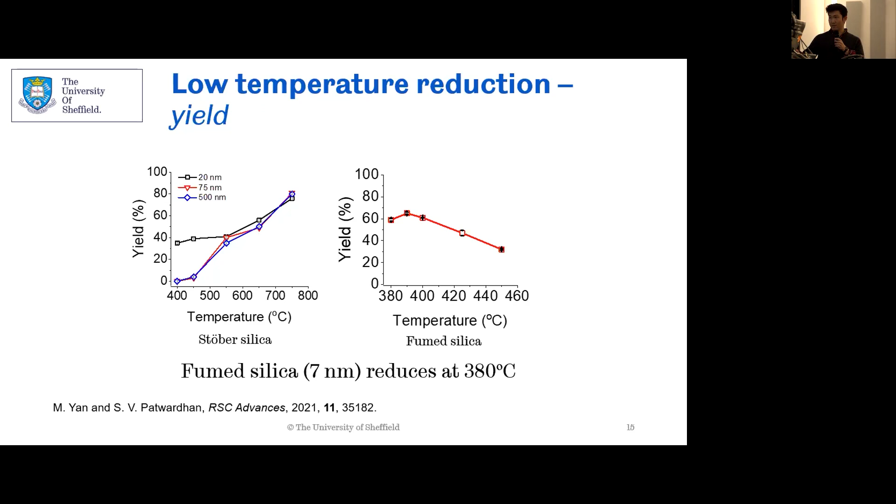This study I did is in this paper. During my PhD I was fortunate enough to have the opportunity to go to Canada to work with a group also working on magnesium reduction. It has implications for the techno-economic study that I will present to you next.

They use a method where they ramp up to 650 degrees Celsius and then hold it there for an hour. This is because the reaction is exothermic, so it can sustain its own reaction because it produces heat. This has an interesting implication: it stays at this low temperature for most of its time, 6 hours.

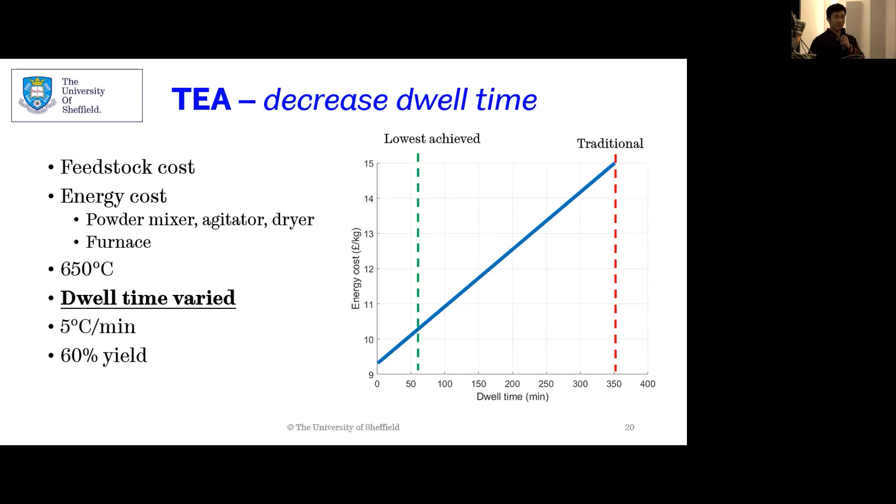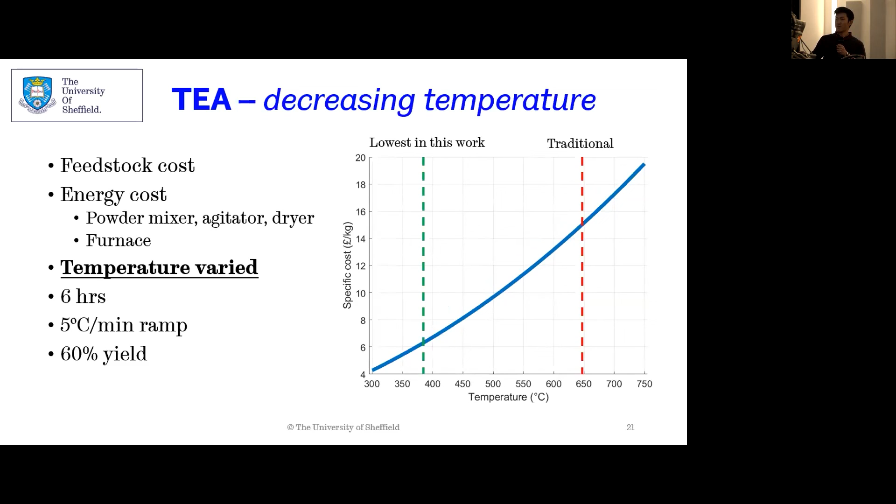So by bringing the reaction down, that makes the biggest difference. So, emissions, the yield, and the time it takes—this is the true cost of 380 degrees Celsius.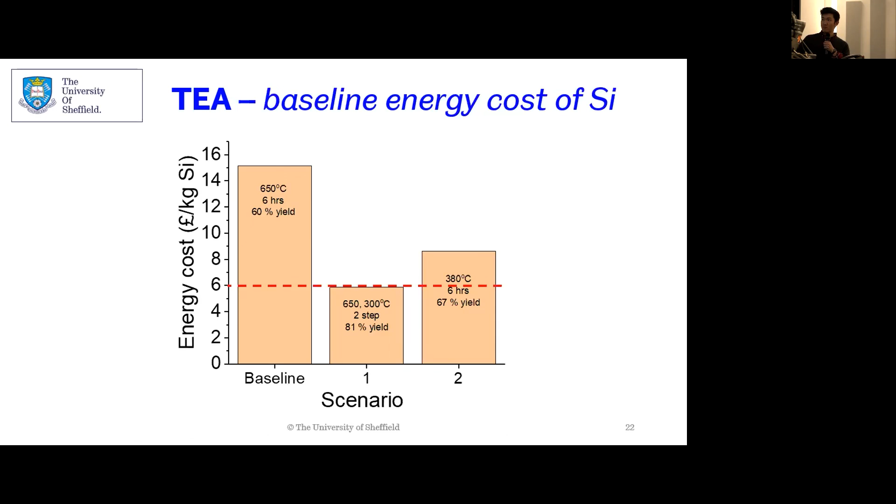Really, it's staying at 300 for most of its time. At 650, it's only there for half an hour. It's a benefit over this method, but it will take longer, because in the whole scheme of the process you have to ramp the temperature up to 650 and then allow it to cool. So it seems the most obvious option here, but there'll be some scheduling problems that has. That's what I wanted to show. So really, yes, the reduction temperature can be brought down to as low as 380.

41% at 380 degrees Celsius with a yield of roughly 67%. So in terms of the capex, if you have to pay for the nanoscale—because I'm from a chemical engineering background, I like to go back to the process scale. So the nanoscale, if you make changes there, can really affect the whole process.